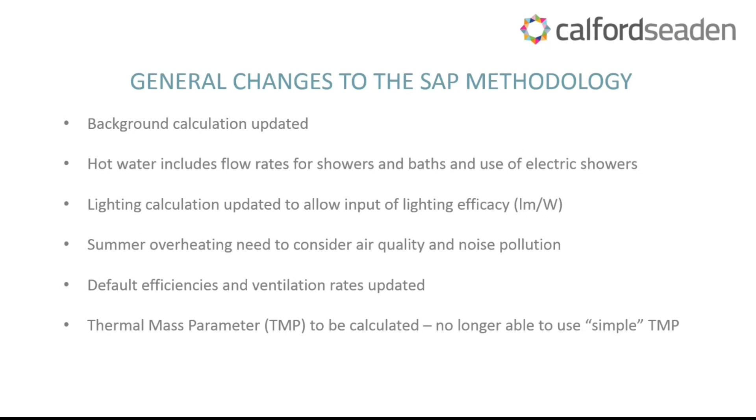Default efficiencies and ventilation rates have been updated to reflect the current market. So this is just to make sure that we use the best products possible within our SAP calculations. And the thermal mass parameter has to be calculated. So at the moment we use a simple TMP of low for timber frames, medium for light concrete frames, and high for dense concrete frames. But this is more work for the SAP assessor rather than for the design team.

So key changes. These changes have the biggest impact on the SAP calculations. So the thermal bridging Y value default has increased from 0.15 watts per meter square Kelvin to 0.2. So at the moment, if we use 0.15 as the default, we will find that we have to make improvements elsewhere to the building fabric specification to achieve compliance. So applying the 0.2 will be quite difficult.

At the moment, we can apply accredited construction details for our psi values if we calculate the thermal bridging, but the ACDs are going to be scrapped. The government is thinking about bringing in another library with some standard details that we could apply to our SAP calculations, but it's likely that we'll need to carry out bespoke psi value calculations.

If you have a detail that you use on the development, so a cold bridging detail for where your external wall meets your ground floor, or your external wall meets your roof or an intermediate floor or your corners, then you can apply that detail. Once it's been calculated, you can apply that across the development. So you don't have to get each property calculated.

So you can just use one detail that you apply across the development. And if you carry that detail across to another development, again, you can still use that same detail. So you won't have to get a new set of psi values calculated, as long as the details are very similar.

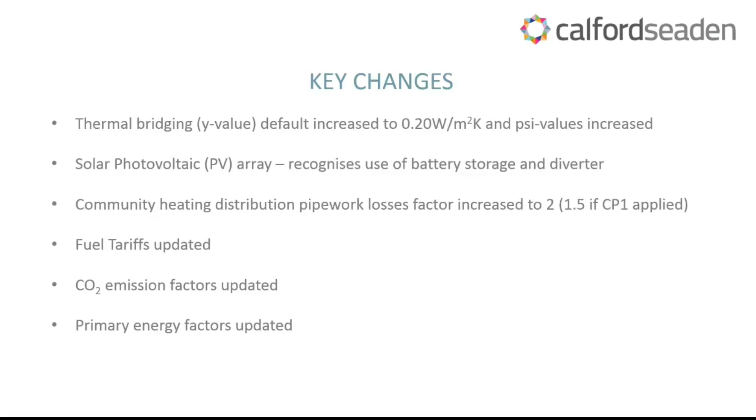Primary energy is basically all the energy used to produce your fuel and deliver it to your house. So for electricity, it's the mains gas, the coal, the renewable technologies, all the energy required to produce that electricity and deliver it to your house.

Here are the updated fuel tariffs for SAP 2012, which is current methodology, and SAP 10.1, which was released with the consultation last year. As we can see for mains gas, there has been a slight increase in the cost for mains gas from 3.48 pence per kilowatt hour to 3.93 pence per kilowatt hour.

For electricity, we can see that that has increased quite significantly from 13.19 pence per kilowatt hour to 17.56 pence per kilowatt hour. And it's worth noting how much different that is compared to mains gas. So it's almost 5 times higher than the cost of mains gas.

The electricity export has also reduced from 13.19 pence per kilowatt hour to 5.3 pence per kilowatt hour. And this is because of the closure of the feed-in tariff. There is a smart export guarantee, but electric suppliers can set their own price, which is why the SAP has taken a low rate of 5.3 pence per kilowatt hour.

Emily, could I just come in there? Yep, yeah, of course. Just an interesting one for what we'll be looking at later on in the slides.

The key point to note, as Emily's brought up, is electricity being 5 times more expensive than gas. When we are then considering technologies such as heat pumps, the COP, the coefficient of performance, is every 1 kilowatt of energy to how many kilowatts of heat are able to be produced. So a COP of 1 to 2 is 1 kilowatt of energy for 2 kilowatts worth of heat.

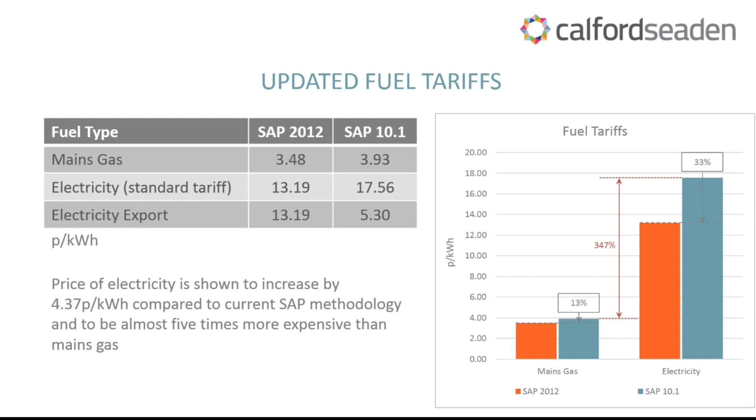The COP of our heat pumps will need to be operating somewhere in the region of 1 to 4 to be able to get our tariff prices to residents similar to what we're charging for gas at the moment. So just a highlighted point to show one of those implications: reductions in CO2 but increases in energy costs. Thanks, Emily. Thank you, Terry.

So here are the updated CO2 emissions. Again, we've got the current SAP methodology, SAP 2012. Then we've got what the GLA are using on the current schemes, which is the SAP 10 methodology released in July 2018. And then we have the most current update, which is SAP 10.1. So for mains gas, there's been a slight decrease in CO2 emissions from 0.216 kilograms of CO2 per kilowatt hour to 0.21. So it's just a 3% reduction.

Electricity, however, we can see that what the GLA are using has a 55% reduction over the current SAP methodology. So we're going from 0.519 kilograms of CO2 per kilowatt hour to 0.233. Under the SAP 10.1 methodology, the CO2 emission factor for electricity decreases even further, a 74% reduction over current methodology at 0.136. And that is actually lower than mains gas, which is why we're being pushed down electric heating routes rather than mains gas.

It's also worth noting that with electricity generating technologies such as solar PV, you'll need more to save the same amount of CO2 as you do under current methodology. If you see my mouse there, at the moment with PV, we're saving this much CO2. But under SAP 10.1, we're only saving this much CO2, using the same amount of panels. So you'll need more panels to achieve the same CO2 emission saving as under the current methodology.

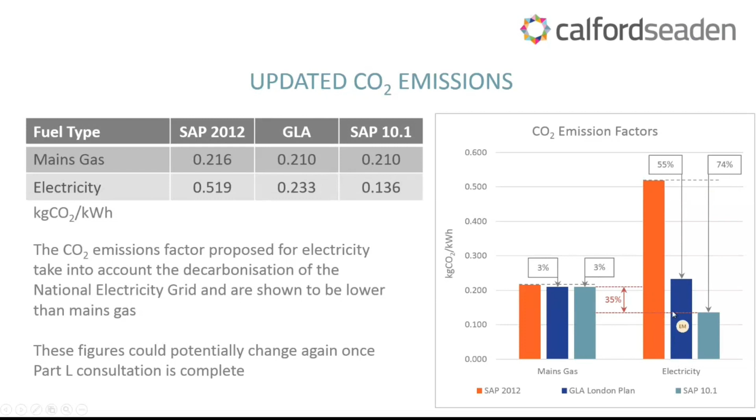So just to demonstrate that, we carried out an exercise in SAP calculations using different heating systems and technologies. On the left-hand side, we've got a gas boiler community heating system, with the current SAP CO2 emission factors, the GLA SAP factors, and SAP 10.1. Using the same specification, we get a 17% reduction in CO2 using GLA factors and a 22% reduction using the SAP 10.1 factors.

Even though mains gas has the same CO2 emission factor for SAP 10 and SAP 10.1, because of the reduction in electricity, we're saving even more CO2 for our lighting, pumps and fans, which is why we have a slightly better reduction there. However, for solar PV, you need more PV to save the same amount of CO2. That's reflected here, where CO2 emissions are actually higher under SAP 10 and SAP 10.1 when using the same PV array as in the SAP 2012 calculation.

And that's the same with combined heat and power, CHP engines. We're not getting as great a saving as we would currently under the SAP methodology, and this is why we're moving away from CHPs in London schemes. When you apply electric heating systems, you get your 55 and 74% reduction in CO2.

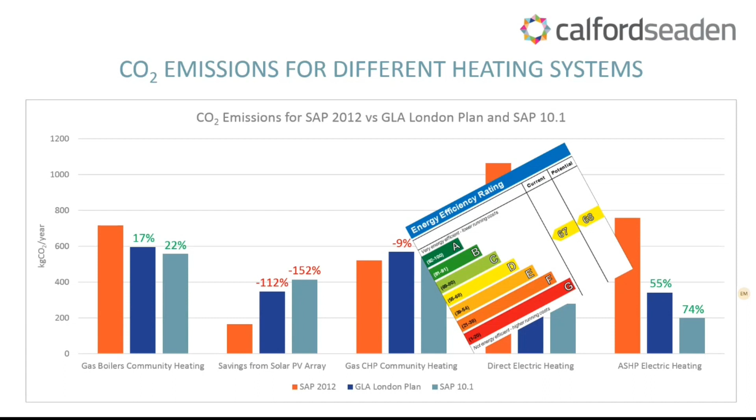So early stage development and early stage review, I would really strongly recommend at the planning stage and at the early concept stage, run some early stage SAP assessments, just so that it gives you a real clear indication of what that means. Primarily the cost driven element, not anything to do with lowering CO2, but just the cost element. Thanks, Emily. That's okay, exactly.

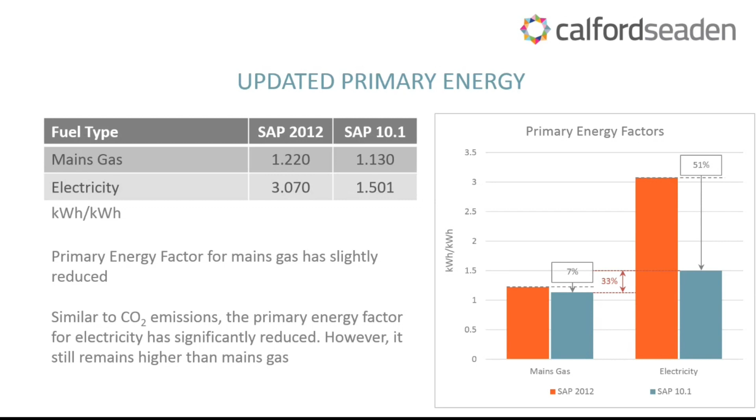So now that primary energy is going to be a main performance metric under the new Part L, we've just got to make sure that we achieve this primary energy target, especially if we do go down a direct electric heating system. As with the EPC, you might need building fabric improvements and renewable technologies and battery storage on site to achieve that primary energy target.

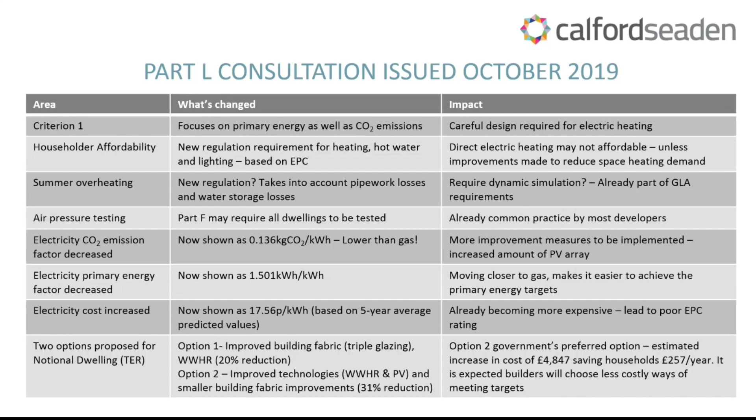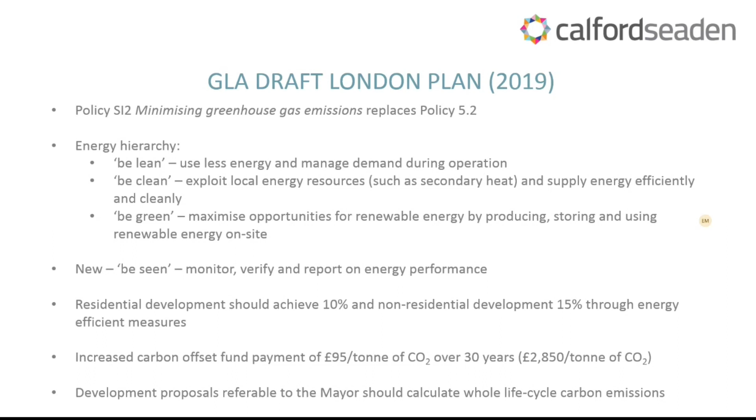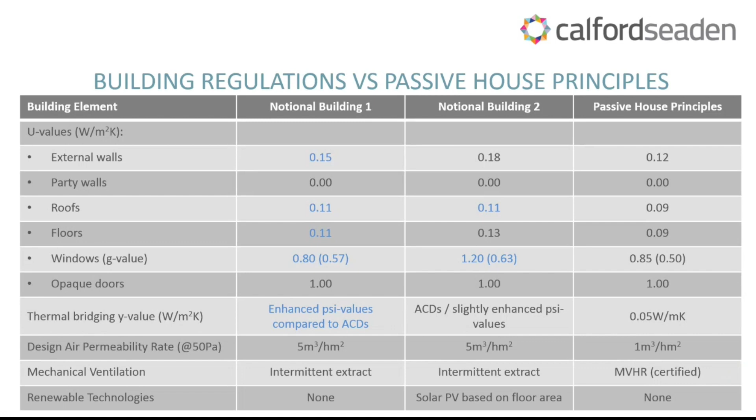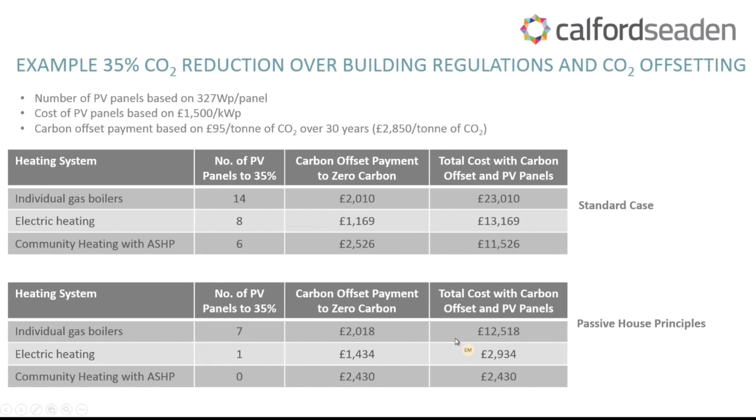But applying those Passivhaus measures and reducing that space heating demand, we can significantly reduce the number of PV panels required. So for gas boilers, 7 panels are required for the 35% reduction. For electric heating, we'd only need 1 panel, and for community heating with air source heat pump, we wouldn't need any to achieve that 35% improvement over the target emission rate. So even though the carbon offset fund payment is very similar because we're achieving 35% in both of the options, total cost is reduced because we don't have to spend so much on the solar PV panels.

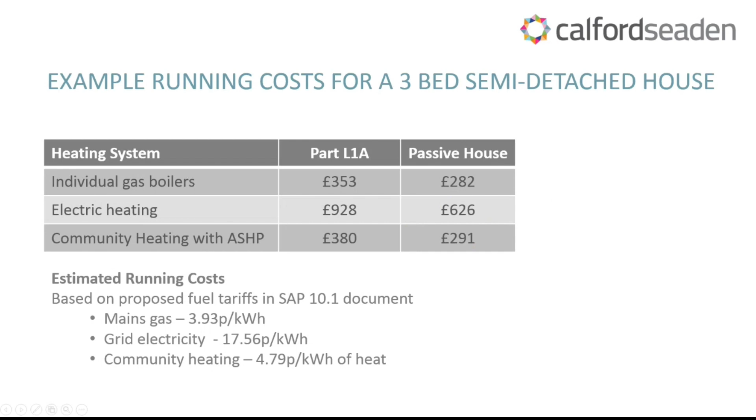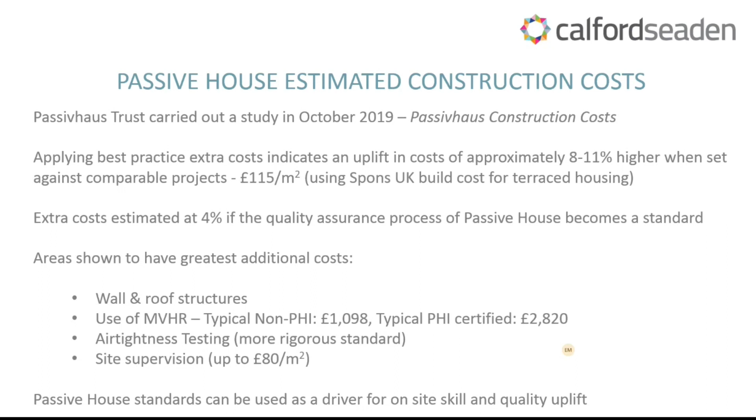We could almost be doing this on a first fix, second fix basis. So an air pressure test at the end of the first fix stage, and then a second air pressure test at the end of the second fix may be a way of accommodating that kind of air tightness testing. Exactly. And also site supervision is shown to have an uplift cost. However, that can be reduced by applying best practice across the site. I'll now pass you over to Terry, who's going to talk about the heat pumps.

Hi everyone. Right, I'm gonna look at 4 areas for heat pumps today, and we've primarily chosen air source heat pumps, or air source and water source. Our second system there looks at both an air source and a water source system. We haven't selected ground source, but ground source is obviously another option, and part of our ongoing seminars is that we will do a few seminars specifically on all heat pump arrangements. But today, just as a little analysis for you, as air source heat pumps are the more cost-effective option, we just wanted to show you what those models were like. So I'm going to do 4 today.

One is a centralised air source heat pump, which is a heat pump only. So it would be a system where we would be doing communal heating, but we would only be putting in air source heat pumps. The second one would be similar. It would be a communal air source heat pump arrangement, but in this case it would be an ambient heat network where within each of the dwellings we would be using a water source heat pump. So air source heat pump at a lower temperature, water source heat pump within the dwelling.

The third one I'm going to look at is an individual air source system with an external compressor, something you'll probably be much more used to seeing in air conditioning environments. And then the last one I'm going to go to is a hybrid system. We're looking at a heat network that uses both gas boilers and air source heat pumps, but using the 2 technologies where they are most beneficial. So moving on.

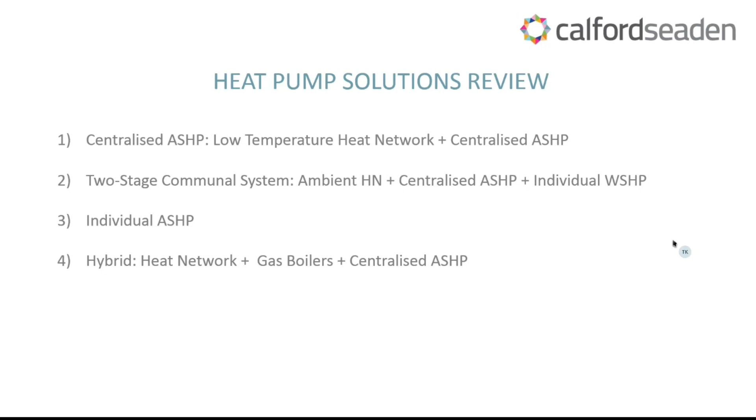The reason we've chosen 2.5 is obviously that's the main key area if you are going for renewable heat incentive. So if you are getting funding for your air source heat pump to lower the overall costs, the air source heat pump system must run at an efficiency of at least a COP of 2.5.

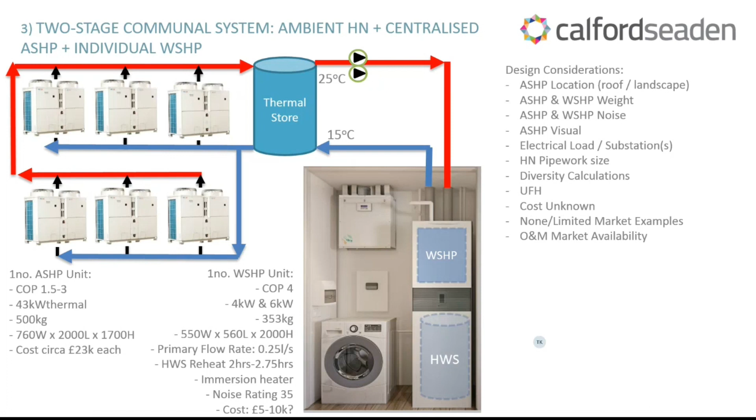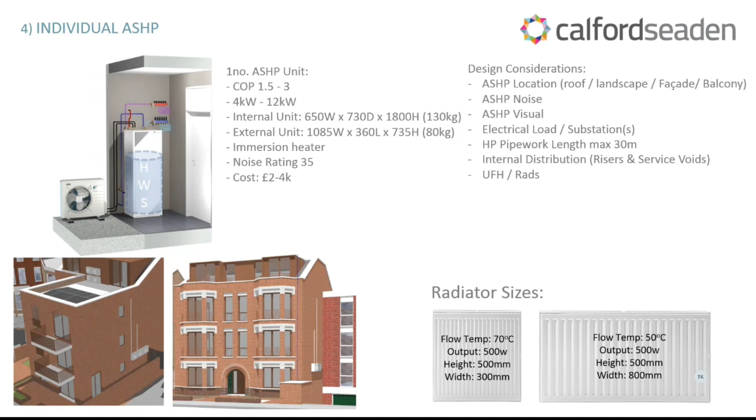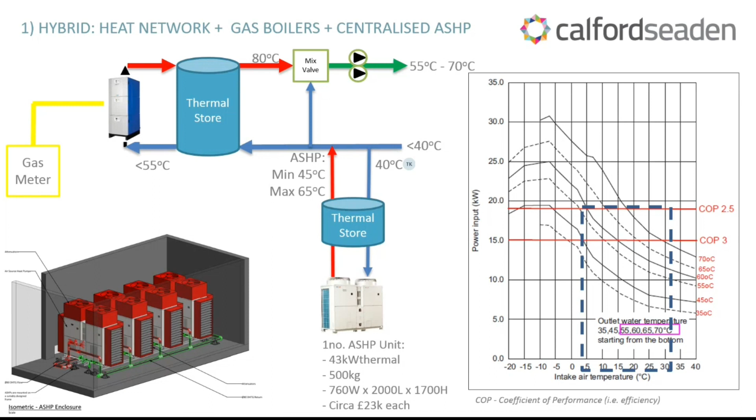Just as a final couple of recommendations, through all of what we've talked about, and Emily with the building regulations and the Passivhaus review earlier, and with my discussions on the air source heat pump, we really recommend you get that sustainability consultant in at an early stage so that you can start looking at some of these strategies. And here we can definitely help early on in the day to show you what the implications are on fabric size, on room sizes, on dwelling size of the different kinds of technologies, so that you can make the right financial decisions on the amount of units and the size of those units.

Fabric first approach, and as you know, we've always pushed that, but it's a part we will be pushing more and more in the future, and we think it'll have a greater part to play. Myself and Emily and Petrula and Dr. Chris Marion, one of our other guys, are also putting together a research paper that we'll be able to show you, where we've been analysing this on 7 or 8 different housing types, as well as off-site construction. We've been working with an off-site construction company called Tallow House to see what we can do with the fabric first conditions.

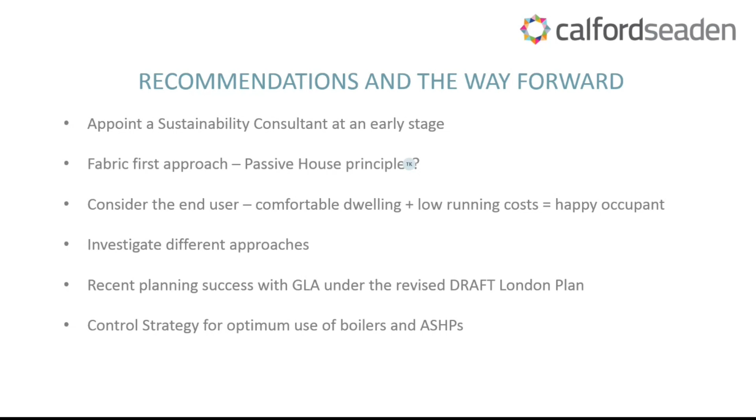So I think there is government interest as well, especially when we look to this 2025 banning on gas boilers. There may be some leverage where it's a gas boiler that is hydrogen ready. So we will keep our ear to the ground on that, and we'll let you know more about that.